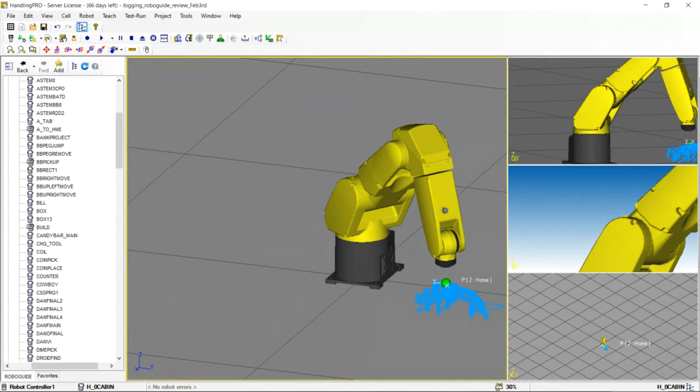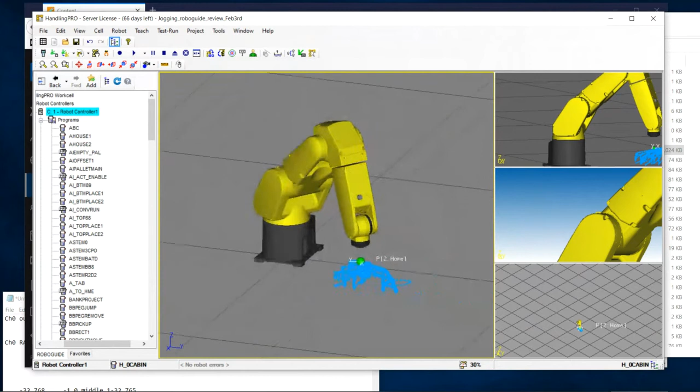So if you want to make a backup of not just files on the robot, but your Roboguide virtual image, this whole thing here is a virtual image of the entire robot. Not just the files on the robot, but the other things on here, like the pointer, what pointer you have, and things like that.

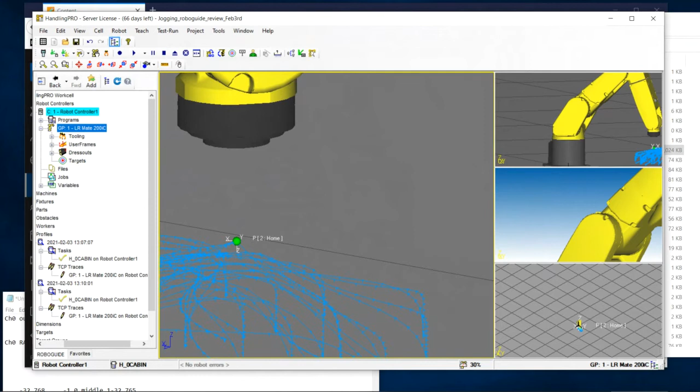Notice that the pointer, you see the green ball, but the pointer isn't there anymore. That's because I changed frames. My pointer image, if I click on tool 1, is associated with tool 1, so it's only visible when I'm in tool 1. If I'm in tool 9, my pointer doesn't appear. So your pointer only shows up based on the tool frame you told it to show up on, and that's why the pointer disappeared on me there.

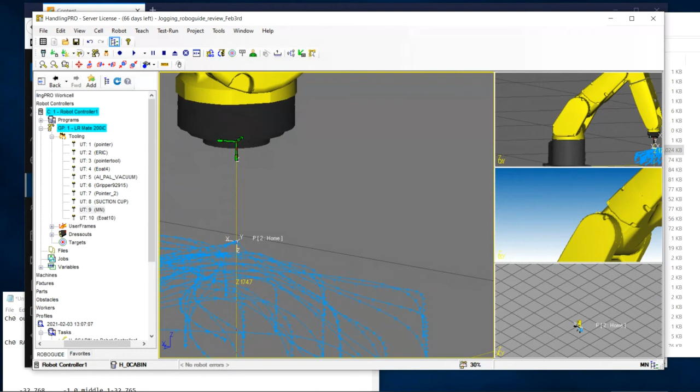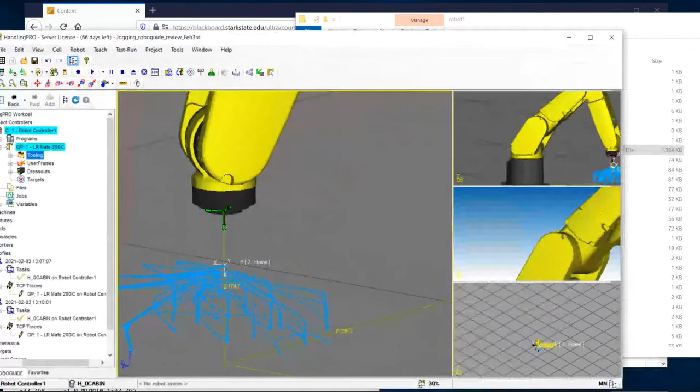So that's why you need to back up everything, not just the files of the robot controller. The way we do that: first, remember the name of this, Jogging Roboguide Review February 3rd, that's the name of this. The first thing we need to do is close Roboguide. If we want to back it up, we close Roboguide, say yes, close it, and then go to that file.

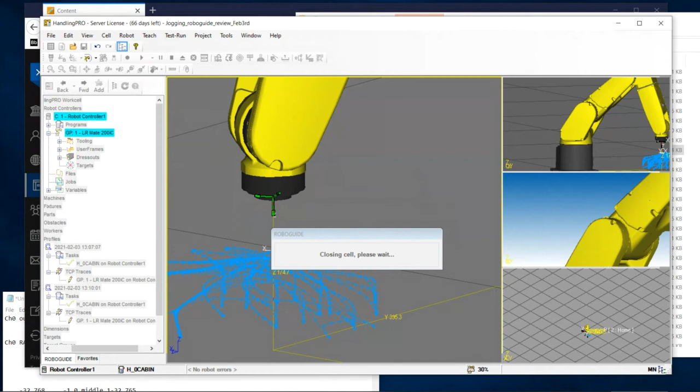Now remember, I suggested you put that file in a folder under your name on the D drive. But you need to make sure Roboguide is closed. I'll give it another few seconds to make sure it closes out, because you can't make a copy of the files if Roboguide is using them.

So we went there, and now I put it on the D drive. I'm going to come up here. If you just go to the address bar, you can type in D: and it'll take you to the D drive, or you can scroll if you like to scroll your mouse, whatever makes you happy. But now you can see here's the file, and if I look in here, there's lots and lots of junk in here.

What you need to do is take this entire file, which is everything, right click on it and say send to zip file, or compressed zip folder as it says. So send it to a compressed zip folder. Now you can see this is actually a 14 megabyte file, so there's quite a bit there. You can rename it if you want, but I really recommend leaving the name alone.

And now this zip file, you can either email it to yourself, or copy it over to your flash drive, or upload it to your Google Drive, Dropbox, OneDrive, or whatever kind of remote storage you might have. But I highly recommend you put it in this zip file, and then just transfer that one file so you make sure you don't lose anything.